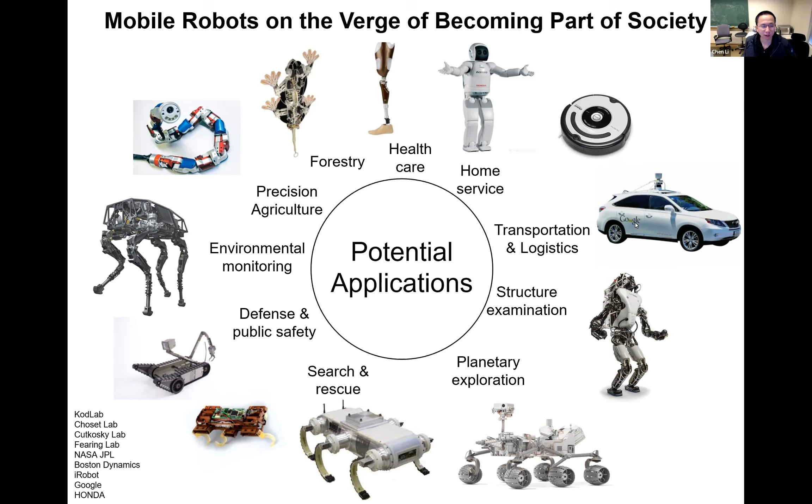When we look at how robots deal with the problem of locomotion in complex environments, it has very often been considered as a problem of obstacle avoidance. As an example, the self-driving car uses sensors to scan its surrounding and create a geometric representation or map of its surrounding. You can then plan a safe trajectory to avoid anything other than the paved road, and then very often transition between different driving modes to reach your goal.

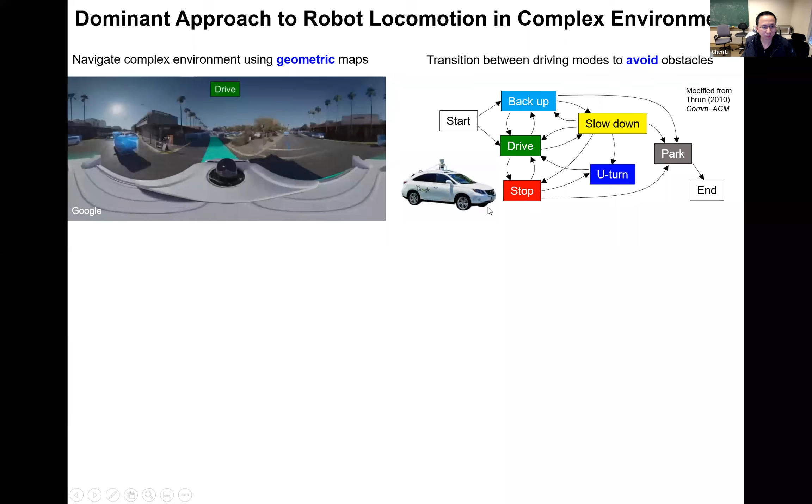In order for this to work well, there are two premises. First, the interaction between your vehicle or robot and your environment, in this case the wheel-ground interaction, needs to be well understood. Second, your vehicle or robot needs to be readily controlled to follow the planned trajectory well.

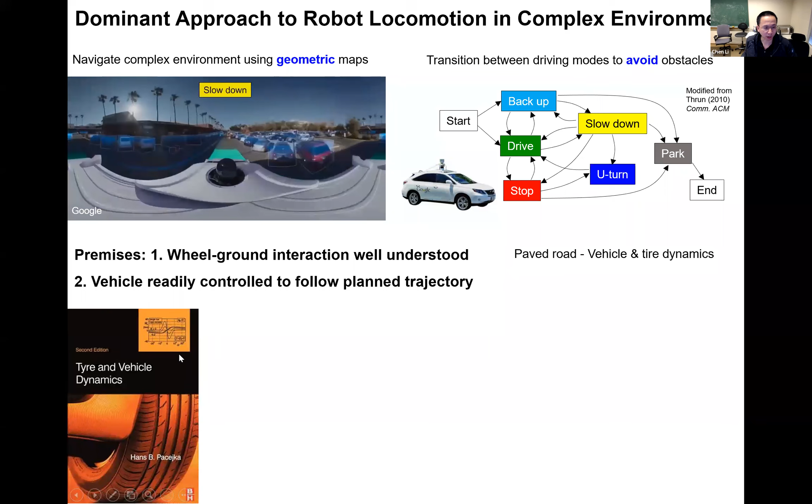This is thanks to, especially the first one, but also the second one, really thanks to development in the fields of tire and vehicle dynamics for paved roads, as well as terramechanics over the last few decades for off-road vehicle-ground interaction.

Analogous to this, we also have very good understanding of the aerodynamics and hydrodynamics of both biological and artificial devices moving in fluids, flying and underwater locomotion.

On the other hand, for terrestrial locomotion that's non-wheeled, that is biological or bio-inspired robot locomotion, our understanding for a long time had been relatively limited to relatively simple, flat, rigid ground, and very often looking at how to maintain near steady state single mode locomotion, such as walking and running. While we have really fantastic progress of these kinds of models,

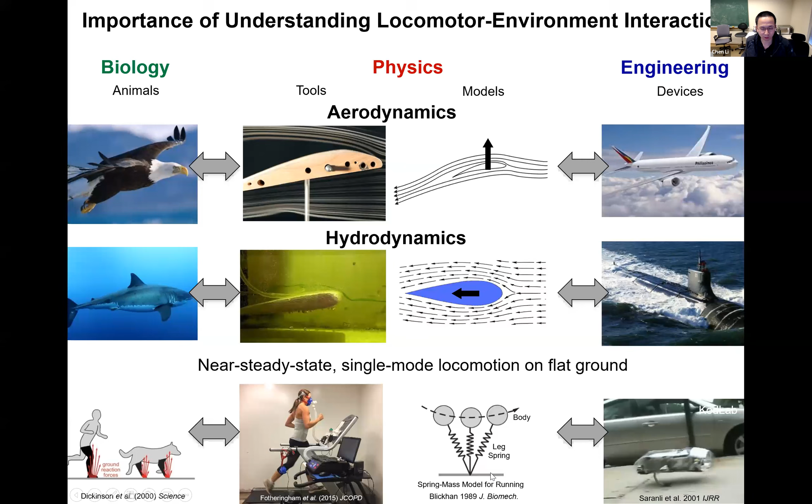we already have, through decades of development, fantastic models describing such leg-ground interaction. And this really is the basis of a lot of modern legged robots.

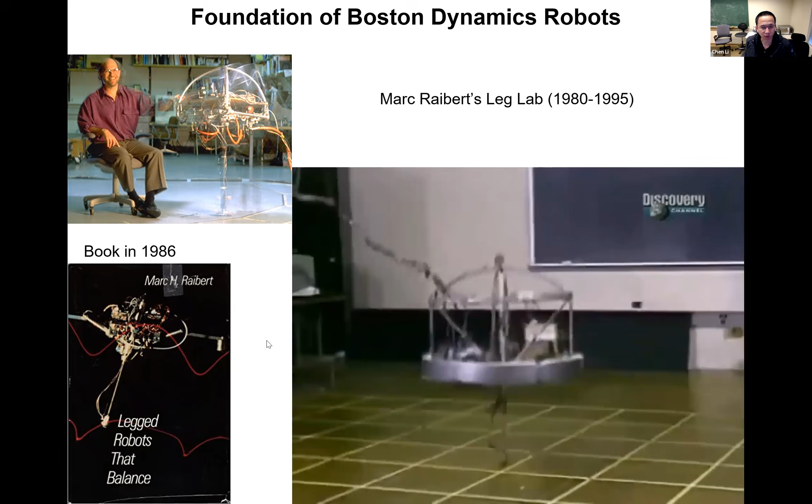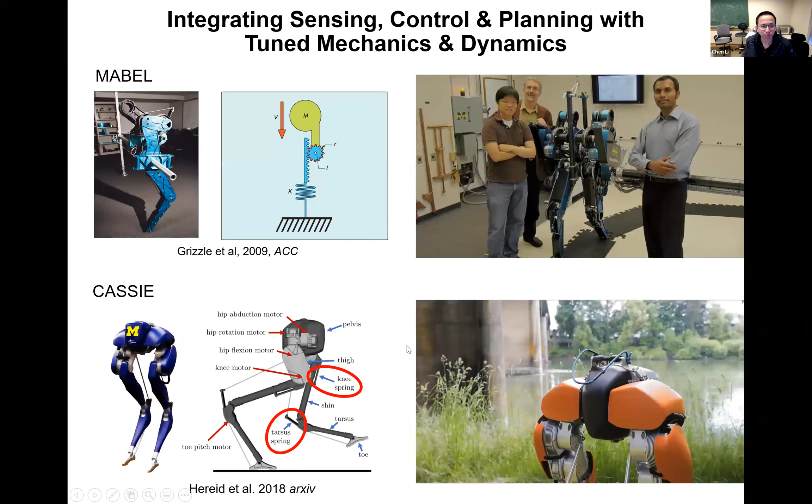Just a little bit of history. Marc Raibert, before starting Boston Dynamics, was actually a professor, first at CMU and then MIT, and he studied legged robots interacting with the ground, making use of fundamental mechanics understanding to build these beautiful early robots, which provided the foundation of more recent Boston Dynamics robots. You can see here they have elements in the leg built in to make use of the spring-like bouncing dynamics on rigid ground. This is also true for other more recent robots, as shown by some examples here.

However, when it comes to more complex terrestrial environments, such as desert sand or Martian soil, where you have ground that can deform and flow under your feet, or forest floor, where you have a lot of obstacles piled together, and earthquake rubble, a similar terrain, we can see that obviously these relatively simple ground interaction models will not apply.

So in order to make progress, we need to begin to develop more tools and models to systematically study and understand the physical interaction with complex terrain. Or in other words, we need to create this new field of terradynamics.

This was really first started by my PhD advisor, Dan Goldman, in his lab. Through an experimental physics approach, his lab focused on understanding different forms of locomotion in granular environments. I was fortunate to be one of his first PhD students, and I worked on legged locomotion.

I studied how lizards and legged robots run on sand, and eventually create physics models. Here I have to be very grateful for Paul Umbanhowar, who at the time was collaborating closely with us. I vividly remember Paul coming to Georgia Tech and carefully watching how the leg of this robot interacted with sand.

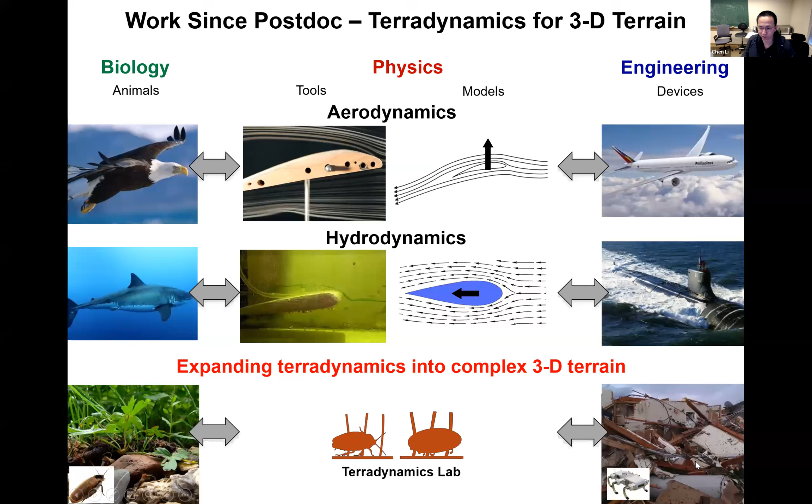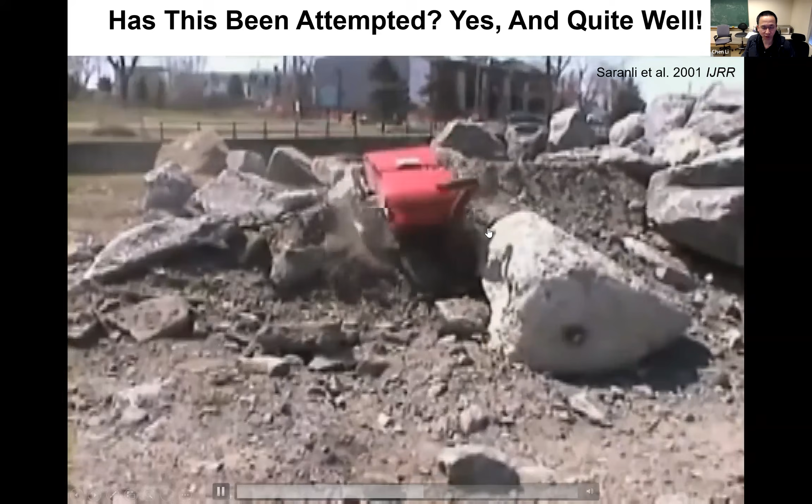That said, people have attempted to do this and had reasonable success, except it's mostly through trial and error. Here's a very early video from Koditschek's lab, around early 2000s, and you can see this RHex robot can actually do pretty well overcoming fairly large obstacles through its nice mechanical design as well as human manual control.

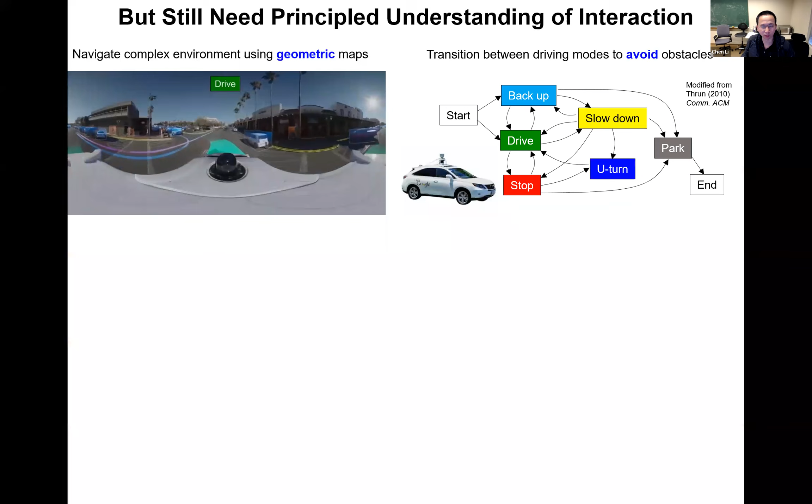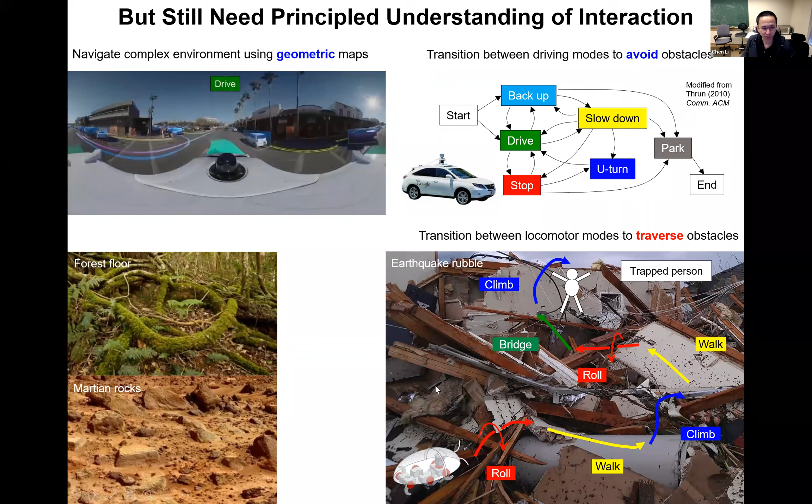But we still lack a way to do this in a principled way. My hope is that if we can have some kind of principled understanding with predictive models, we can eventually begin to make predictions of how you can transition between various modes to reach where you want in this kind of environment. And this is the video I mentioned of the RHex failing in such terrain.

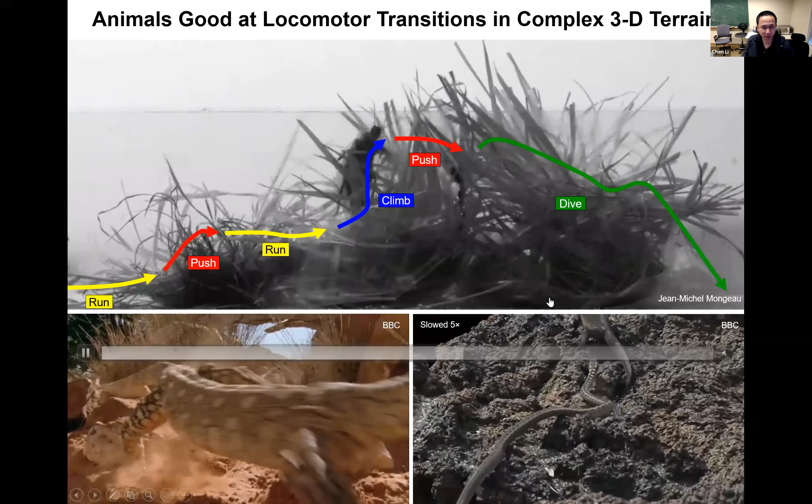Animals, obviously, can do this really well, as we all know. In this example, you can see a cockroach making transitions between several different modes to go through this very cluttered grass obstacle.

When we look at our understanding, our more quantitative and predictive models of legged locomotion, we can see that the majority of these models, as I mentioned earlier, really focus on how to generate and stabilize a limit cycle, single-mode locomotion, such as walking and running.

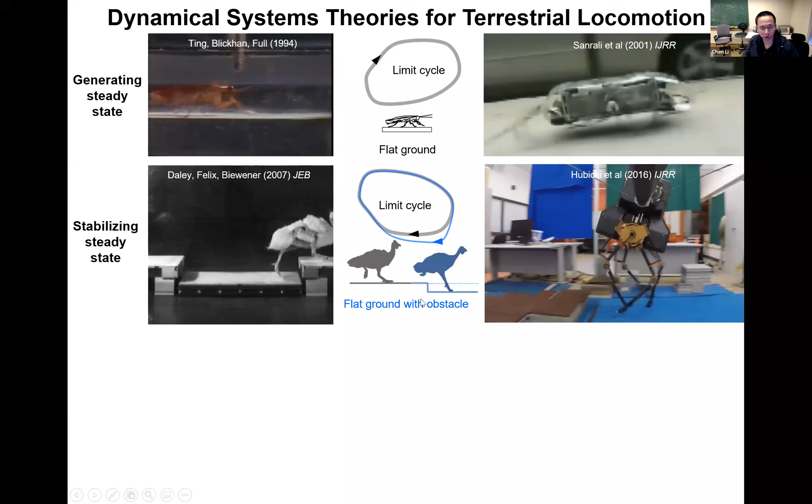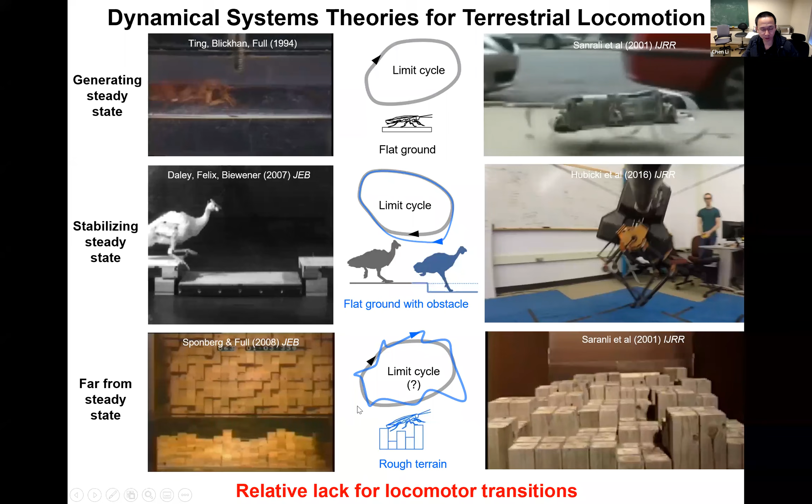However, when you start to interact with these large cluttered obstacles in real world terrain, you can see this is unlikely to be the case—the system often gets thrown away from that. So we have a relative lack of theories or even concepts to think about locomotor transitions.

When I first thought about this problem, a forest floor like this just seems formidable. You have all kinds of stuff piled together—they're heterogeneous, both in physical properties and spatial distribution. So how do we even begin to study them?

The very simple first step I took as a postdoc was to zoom in on one particular type of obstacle: dense vegetation. I picked grass as a relatively simple model terrain. But even real grass can be quite heterogeneous and complex.

So what I ended up doing is to use laser cut paper to assemble into these artificial grass, much like you can use a wind tunnel to enable repeatable experiments.

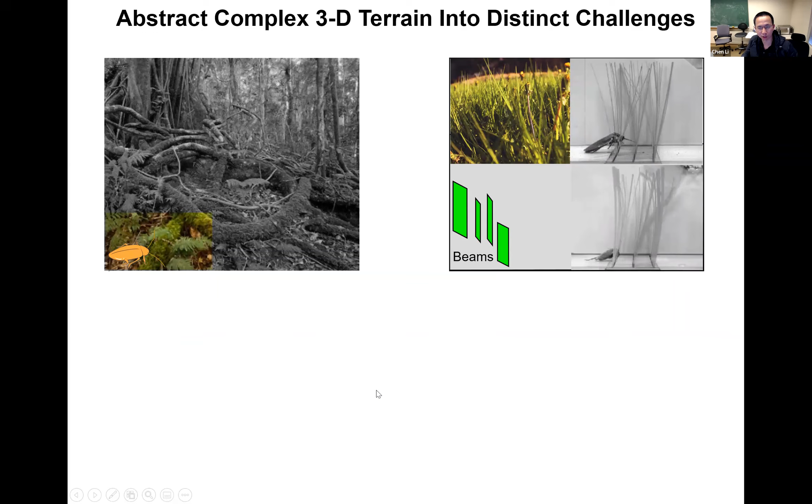In this study in Bob Full's lab, what I found is that if you look at one attempt of the animal traversing, it seems quite stochastic. The animal can sometimes push and roll its body to go through the narrow gaps, and other times it might try to force its way, pushing forward and climbing and falling forward. If you look at one trial, you can't really predict what it's going to do.

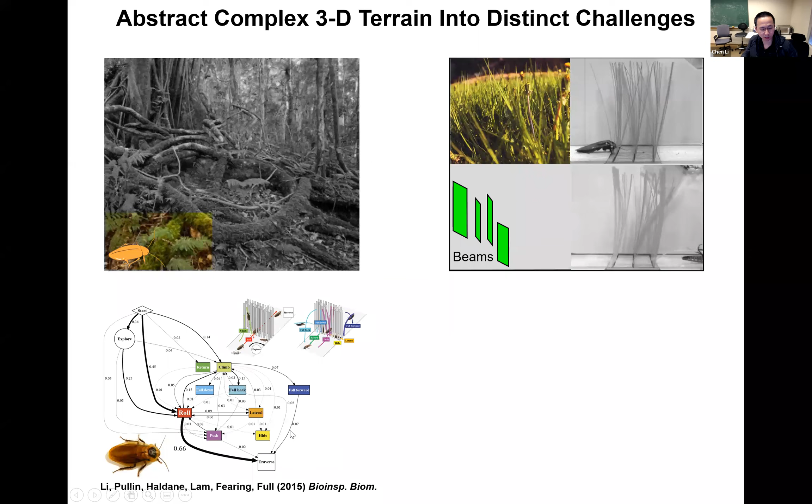But when you have a lot of trials, this is actually from almost 300 trials, you can see that patterns start to emerge. Despite it being very stochastic, the animals seem to use this particular mode, rolling, most frequently, about two-thirds of the time to traverse. This turned out to also be the fastest mode, significantly faster than if the animal uses any other modes.

So that's part of the discovery from my earlier work. In my lab, when we first started, I was thinking how we can really begin from here and go towards something more like a real world terrain.

Obviously, this is not like air and water, in which you have a uniform media. You have these really large heterogeneities. So the very naive approach that we have taken is to abstract these into different kinds of obstacles, which I'll elaborate in just a little bit.

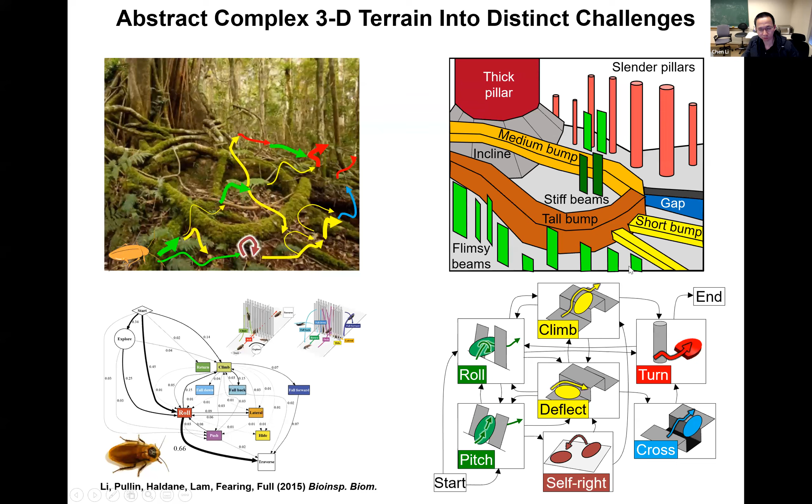Our hope is that if we can understand how the locomotor modes and transitions emerge from locomotor interaction, which can be controlled, then we can perhaps piece these together to begin to understand and even control robots to go where they want in a probabilistic manner.

We take this integrative, interdisciplinary approach. We study animals as model organisms, which can help reveal capabilities and limits. They can also provide inspiration for robots.

We also build robots, very often very minimalistic robots, which we consider more as physical models through which we can do repeatable experiments and vary parameters to test hypotheses.

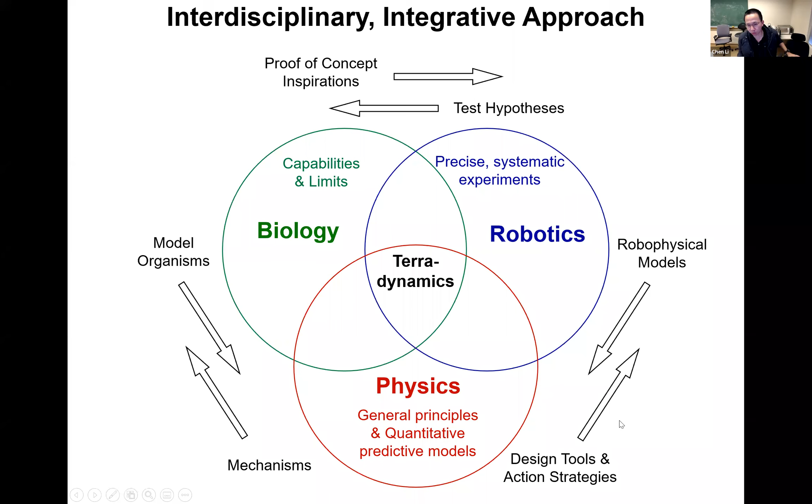Then, based on observation of both animals and robots, we can try to come up with physics models to reveal general principles, and in some cases even have quantitatively predictive models which can help reveal the mechanisms of animal locomotion, both success and failure, as well as provide design tools and action strategies.

We also develop imaging methods to combine multiple cameras with automatic tag tracking to enable 3D quantification of the interaction, which turned out to be somewhat challenging because of occlusion.

And also, this is a very recent development. We also developed this device. Actually, it was built quite a while ago, but we only recently analyzed this data and it's in review.

So we have bumps that are quite high, but you can still move over. We have gaps that you need to bridge across. We have rigid obstacles that we call pillars that you need to go around. We have flexible and movable obstacles like beams, and then we also have, in this case, self-righting, because the animals and robots very often get flipped over in such rough terrain.

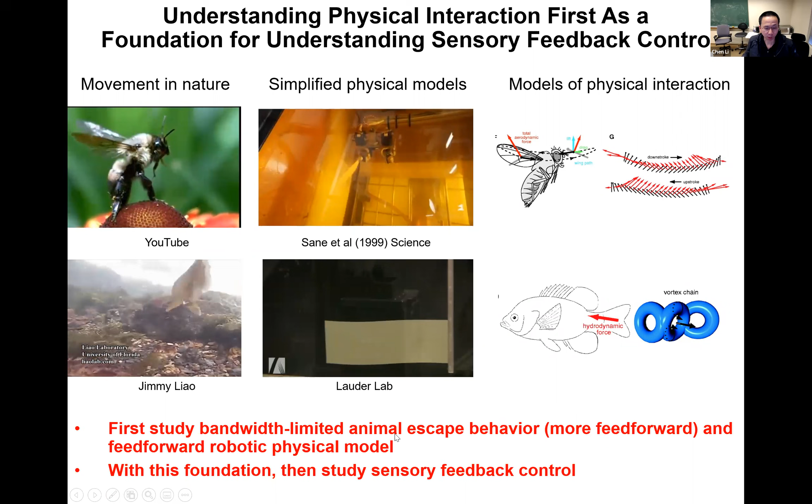But it has turned out to be quite fruitful to first study completely feed-forward robotic systems, as well as animals in the more feed-forward regime, where their interaction mechanics plays an important role in the emergence of their movement. In our case, we focus on studying the bandwidth-limited escape behavior or emergency self-righting behavior, in which the feed-forward effect plays a dominant role. We also start with a feed-forward robot. Once we have sufficient understanding, we can then build on that to further study the sensory feedback control.

Here is the project I want to highlight on legged locomotion transitions. This is led by my PhD student, Ratan, who just defended and just got an offer yesterday. I was pretty happy with that.

In this study, he focused on this transition of cockroaches going through grass-like beams, much simplified, transitioning from what we call a pitch mode to a roll mode.

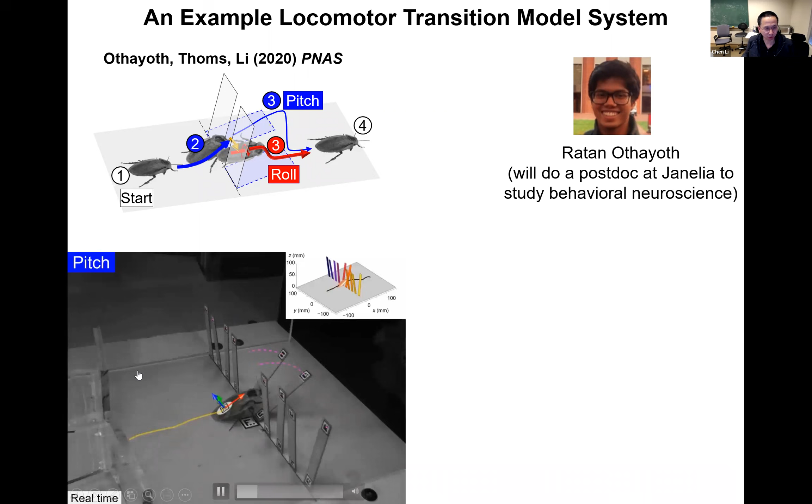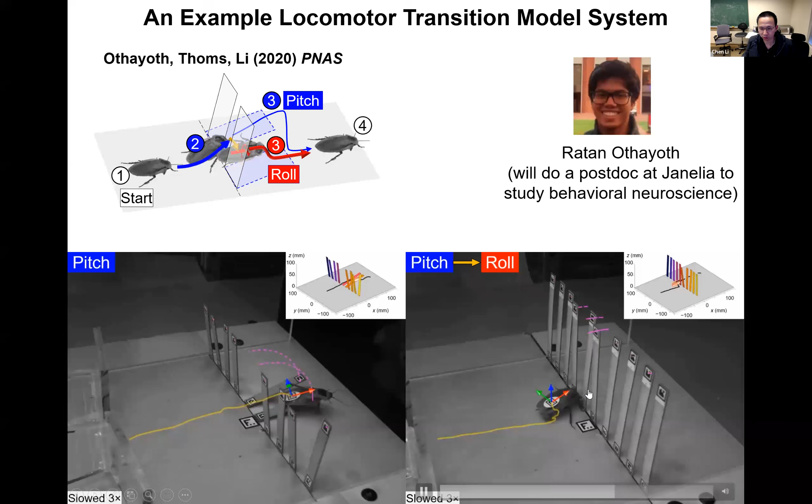Here's what a pitch mode looks like. It really is the animal pushing down the beams, in which its body has to pitch up because of the restoring torque. And here's the animal initially trying to push, but before it even proceeds forward much, it makes a quick transition into this rolling mode.

So how do we begin to understand how this transition emerged from the physical interaction and how it can be controlled? The simplest model we came up with is to merely consider the potential energy of the system. This is an extremely simplified model. There are a lot of assumptions and approximations, and we're completely ignoring the dynamics, but it turns out to give us a lot of useful insight.

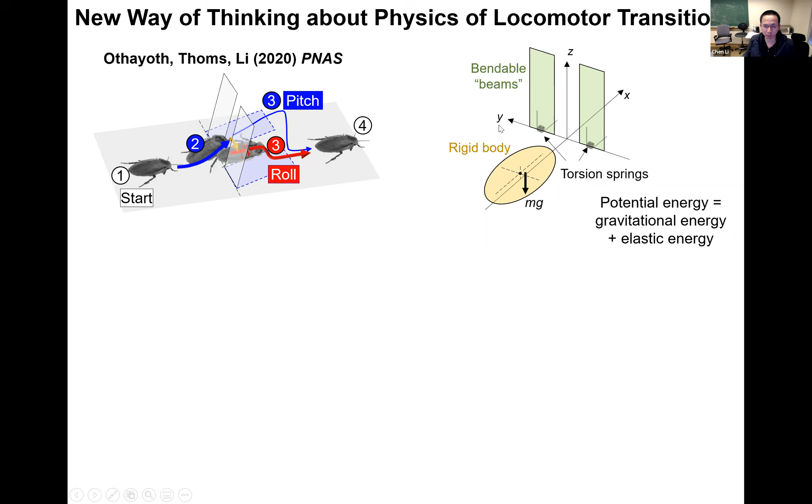Here we consider the animal as just a simple ellipsoid, which their body shape resembles, and then these two plates as rigid plates with torsion springs. We can then calculate the total potential energy of the system if we have measurements from the real system.

So what this just suggests is that perhaps this transition from a pitch mode to a roll mode is a transition of the system from being attracted to this pitch basin to this roll basin, in which you have to overcome a potential energy barrier. So this is our first hypothesis, that this transition might be viewed as a destabilizing barrier-crossing transition, destabilizing yourself from this attraction. And in addition, how can you do this?

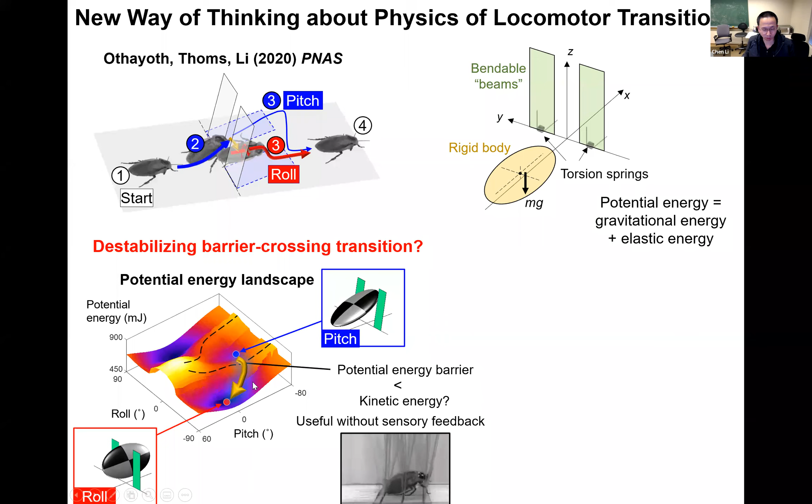If this is comparable to this potential energy barrier, then you would be able to make this transition by crossing the barrier, and this would be possible even without any sensory feedback.

So to test this, my student Ratan built a robotic physical model, which is a physical realization of our simple model. The body is suspended through a gimbal mechanism that allows it to freely pitch and roll with little friction and damping. And also the beams have torsion springs.

So he can then drive it forward as well as oscillate it up and down. We also tried rotational oscillation, and qualitatively the results are similar.

So here are representative trials of the body going forward without oscillation. You can see if it's in the middle of the beams, it's going to be stuck in that pitch mode. And if it has sufficient oscillation, it very quickly transitions to this rolling mode.

After Ratan did this many times, visualizing here, this is the potential energy landscape we constructed from the measurement. He actually tracked the 3D motion as illustrated here to reconstruct the landscape and then show where the system is, which are these dots with a trajectory. So each of these trajectories is one trial.

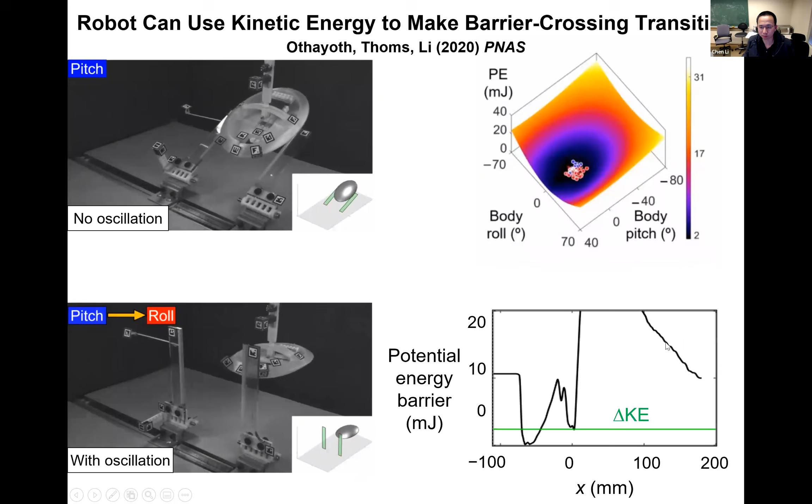So what we can see is that indeed, when the system is stuck in the pitch mode, it is attracted in that pitch basin. These ones that happen to go out is actually an artifact, which I can explain in more detail. But then when the system makes the transition, they all escape from that pitch basin and reach the roll basin. And then we can also quantitatively test the second hypothesis.

So what Ratan did is to measure from the minima of the pitch basin into the roll basin to find that saddle point, to measure the potential energy barrier, the minimum barrier you have to cross to make this transition, which is shown in this black curve.

So it actually changes as you move forward, indicated by X position. And you can see that it goes down to very low, and this green line is the measured system kinetic energy fluctuation.

And we found that it is exactly when the kinetic energy fluctuation is greater than the barrier that the system makes this transition. So this confirmed our second hypothesis.

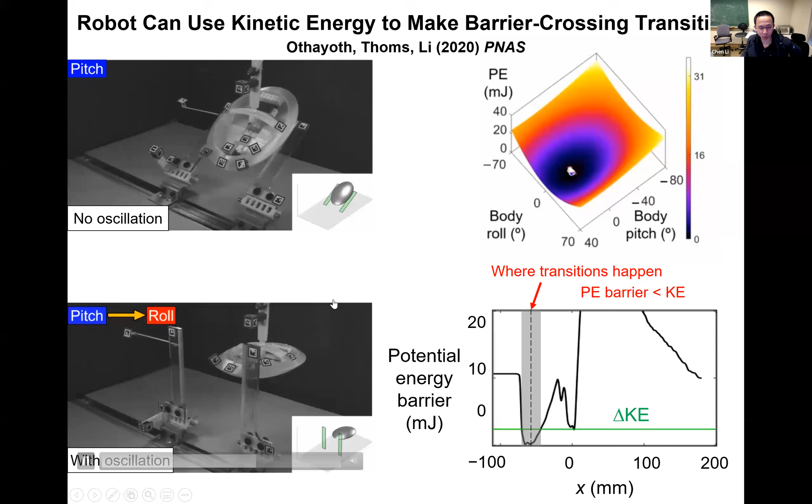And this is not surprising because this is a purely physics-driven system. There's no central feedback control. In addition, we were curious to see what the environment might have an effect on these transitions.

But when the beams are really stiff, then it is much less favorable to push across because you have to overall, through this traversal, overcome a huge potential energy barrier or inject a huge energy. So simply driven by physics, the systems can either stay in the more favorable mode, pitch mode here, or find the roll more favorable mode, roll mode here.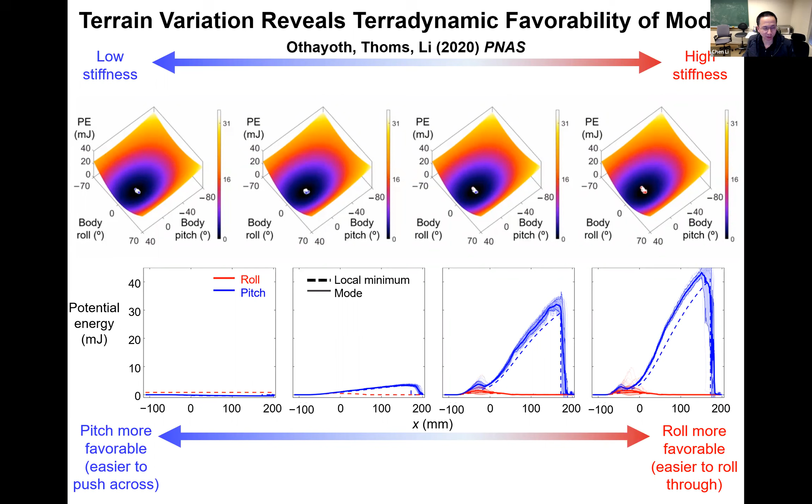So actually what we did is just to simplify the analysis and representation, we flipped all the videos or the kinematic data so that it always rolled to one side. In the case of animals, it's pretty random, but in the robot, if I remember, I think it's all to one side because there's a slight asymmetry in the system that just breaks that symmetry.

Okay, thank you. Okay. Yeah, and then so that's all about the robot. So Ratan also did all these for animals. So we found everything to be consistent except one thing, which is where this transition happens.

So you can see that this is the span where it happened. It actually happened well before the potential energy barrier had dropped to below the kinetic energy fluctuation.

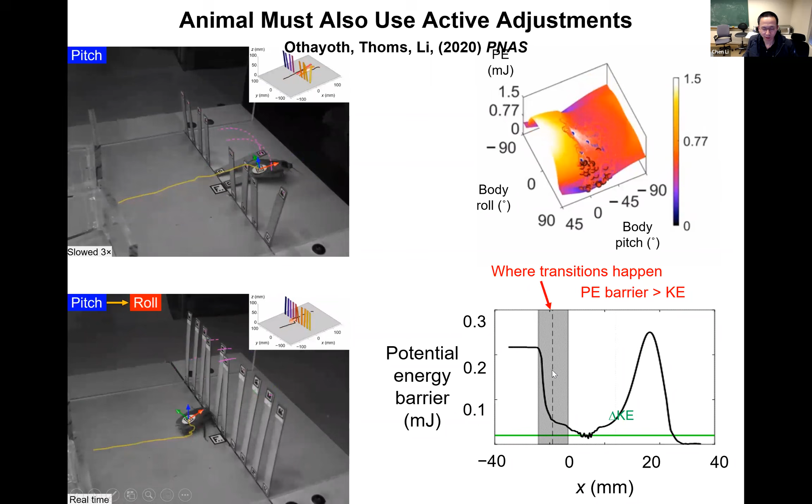Again, this is not surprising because the animals are not dumb robots that just oscillate like particles. They can use a lot of sensory feedback and perhaps even planning and learning to do this. We haven't studied those mechanisms carefully, but we believe these are likely contributing to their ability to do this. So we are just recently beginning to look into it.

This is a recent study led by a more junior PhD student, Yaqing. He performed experiments to quantify the kinematics of the body and the hind legs in more detail, and he found four things that might be helping them.

The first is that they tuck their hind legs in right before they roll. We think that is reducing the roll stability, but without force measurements, we can't say that for sure.

The second is that one hind leg seems to be pushing, whereas the other is retracting. Again, we think this might be generating a roll torque, but we still have to make force measurements to confirm this.

We also found very peculiar head movement. Their head actually bends up and down relative to the body. It's not strictly periodic, but there seems to be some rhythm, and that's before they make the roll transition.

After they roll into the gap, they continue to flex the head as well as the abdomen. We think this is maybe helping them break the frictional or interlocking contact of their body asperities with the edges of the beam.

For the head flexion, we first thought that it might be somehow reducing that barrier, and we modeled that, but that doesn't seem to be the case. So right now we're testing the hypothesis that this could be a form of active sensing, adjusting yourself to tune your sensing of the resistance from the environment, the physical interaction.

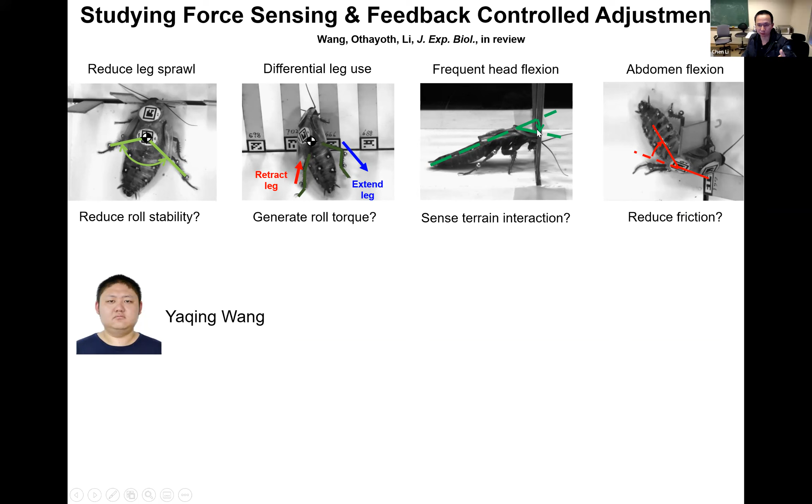To better understand the principles here, Yaqing has just developed a new robot which looks similar to the earlier one, except that it has force sensors embedded. It has the head, body, and abdomen segments and joints that can be controlled.

The control here is under-actuated, because in the animal, roll and pitch are not just controlled by the animal, they're also partly determined by the interaction. So we have the motors connected to the bodies through a spring.

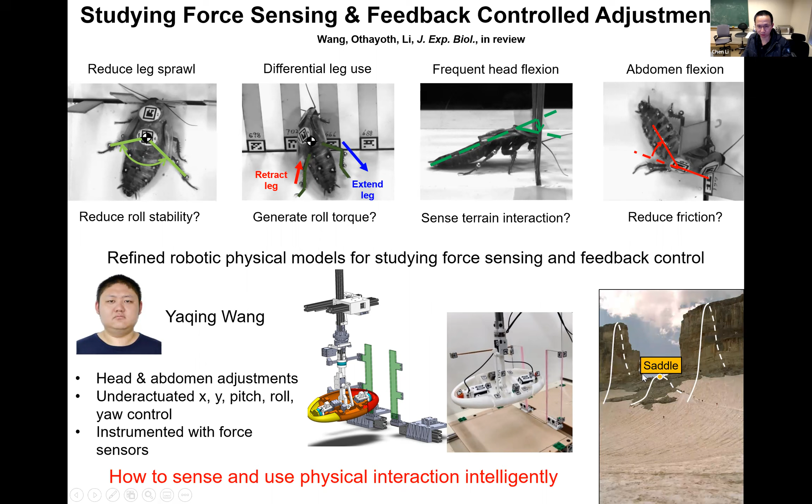We want to use this to systematically study how to sense and use physical interaction and act on it intelligently. One intriguing hypothesis we had is this: if you consider a human going from one basin to another, crossing a mountain ridge, we can see where that saddle point is and just choose that path, which is what these people do. But such a potential energy landscape, we can't really see. Can we somehow infer it and choose an easy path?

We show that the behavior of these systems is strongly dominated by the potential energy landscape, which is basically a description of the conservative forces, though there are also non-conservative forces at play. However, if the conservative forces play a dominant role, then perhaps if we measure these contact forces, we can somehow get an idea of the conservative forces, even if not accurately, at least in the ballpark. If we can then use that to infer such a landscape, we can make the transition as we decide.

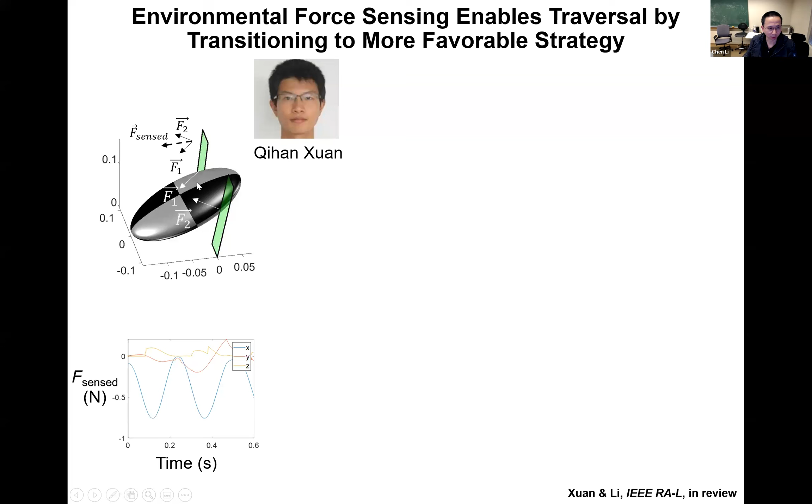So another quick demonstration along these lines, much simpler: just a simple rigid body. What my student Qihan recently did is develop a dynamic simulation in which this body can sense its contact forces from the environment, as shown here, and use that together with the energy landscape to determine which mode is more favorable and act upon it.

Here is a feed-forward case without any control. When the beams are very stiff, and we don't push it forward with an actuator that's strong enough, it's going to get stuck here.

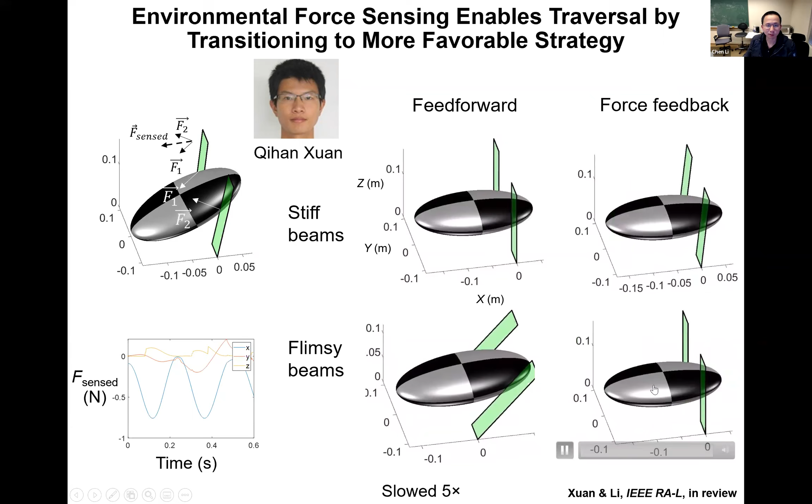But now if you have some force feedback, so we detect, oh, these beams are too stiff and rolling would be more favorable, we can then actuate this to roll and then let it roll back, and then we can demonstrate this.

Okay, so I have spent some time talking about this beam traversal example, but as I mentioned, we have studied these other distinct challenges, and initially we didn't really expect anything common to come out of this, but we actually found quite surprising commonalities.

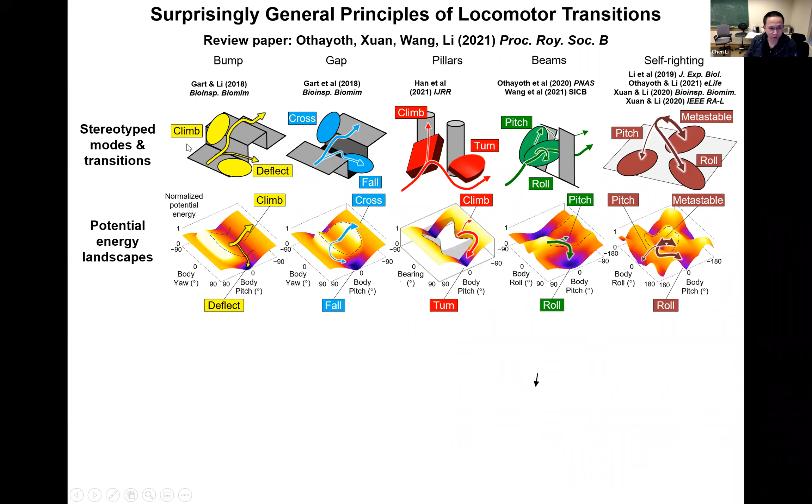First, we found that these interactions all result in stochastic yet very stereotyped locomotor modes and transitions. Earlier we didn't model all of them with a potential energy landscape, but recently we added this view to all of them, and found this can be explained by the fact that on your landscape you have a small number of deep basins that the systems are attracted to, which shows up as these modes, and the transitions are barrier crossing transitions.

Finally, earlier we didn't take this landscape view, but in particular robot experiments, and also some animal experiments, we have empirically discovered strategies to help make desired transitions to traverse obstacles or to self-right, which are summarized here, which give you a boost in your traverse or self-righting performance.

But when we use this landscape view more recently, we found that this can be categorized into three things. You can either steer yourself on the landscape, or you can modify your shape or how you deform yourself. If you do that not to a great amount, then you will quantitatively change the landscape to increase or decrease the barrier, which helps suppress or facilitate some transition. But also you can do that a lot, to even remove some basins or add basins, basically changing the topology to eliminate or add new modes.

So there are these surprising generalities. This is just a video showing a metaphor we think applies: in this case that we have studied with large obstacles or strenuous self-righting.

The potential energy barrier is so high that you really have to understand it and do control or actuate or plan your motion well, to be able to not waste your effort as this little dog is doing.

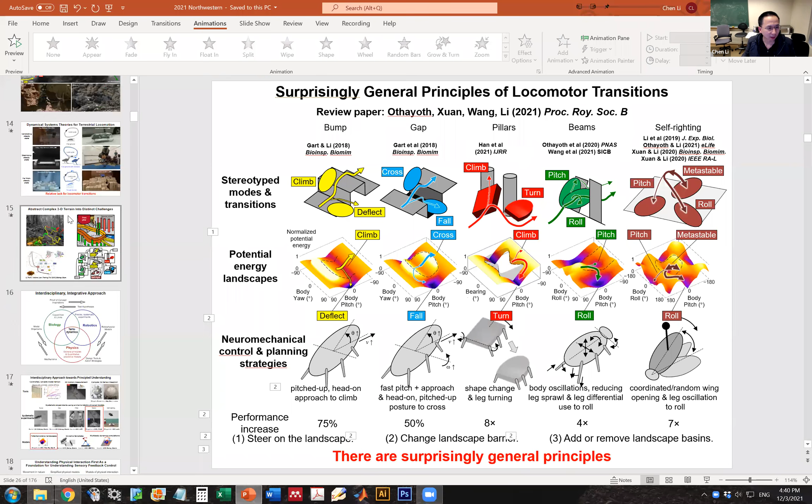So for the self-righting, I can show a quick video. Go back. Yeah, here, this video.

So you can see this cockroach, one of the primary self-righting modes is for them to open their wings to try to push against the ground. But it turned out that the potential energy barrier is really high. They can rarely build up enough kinetic energy by doing this, and that usually gives them a pitch motion because the wings are symmetric.

So what turned out to be important is that they have this flailing of the legs, which we looked into a little bit to see if there's any rhythm or learning, or maybe evidence of learning. We didn't see much, so it seems to be quite random. We think that in this case, yeah, that's evidence of what you just described.

Although we had done another study using modeling, shown below, where we have this template modeling.

So we started with random oscillation, but once we have a model that's predictive, we can actually do it at the right moment, kind of pumping energy at the right moment, so that turned out to be, overall, the energy cost is much lower.

One other question: has anybody with these animals ever done anything like glue them together or add a bit of weight to see if they can actually dynamically change that model, or if it's really kind of fixed for their body? Great question.

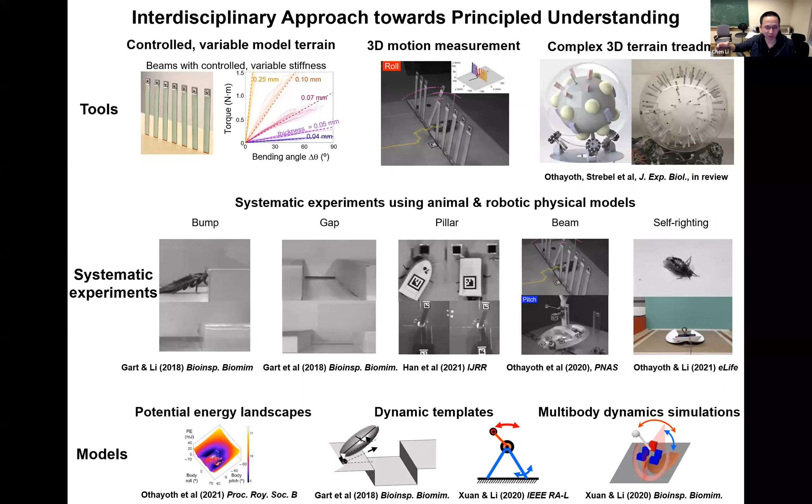So actually, for the self-righting, we also wanted to test a similar hypothesis, like how important this kinetic energy is. We had a robot with which we can easily do that, but for the animal, we glued heavy beads to their feet, which would definitely change how they move. I think their leg oscillation frequency is a little lower, but it does give them quite a bit more kinetic energy, which makes them much easier to right. But we don't see evidence of learning—it seems quite random. Thank you.

Oops, sorry, it's my antivirus. Thought I could turn it off.

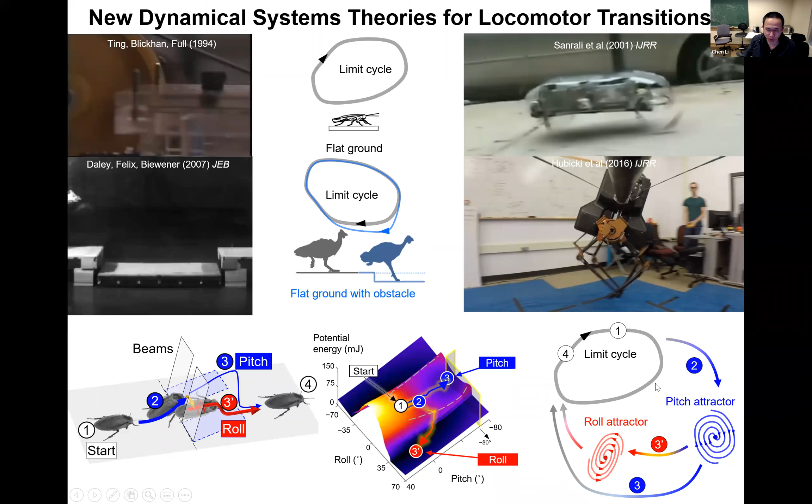Okay, so we think that this might also inform robots. Basically, in such a regime, you really want to understand and control yourself well. More broadly, back to the point I made earlier, people have mostly had limit cycle behaviors for locomotion, and we don't have any dynamical systems model for this yet, but we're hoping that what our study suggests is that there might be attractors which can represent these transient locomotor modes that can be added onto limit cycles. The difference is if you really want to go between these, not try to stay within one attractor or round.

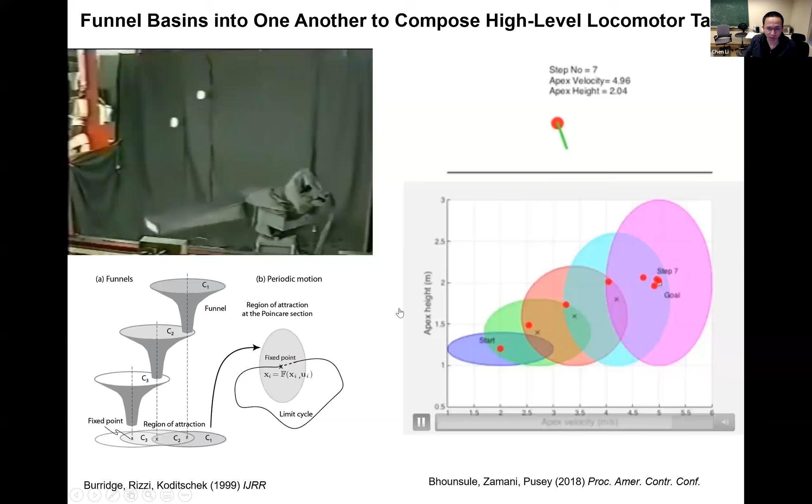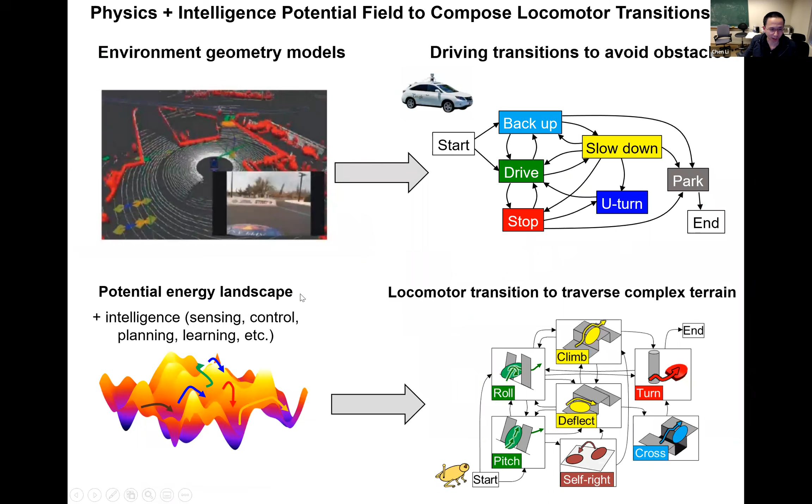This is Dan Koditschek's group doing composition of behavior using attractors funneled into each other to compose high-level behavior. We think that if we add these new dynamical systems models that might be there, we can eventually start to compose locomotor transitions, except that we really have to go away from an attractor. Towards that, we really need a more predictive physics model. Our energy landscape so far cannot predict dynamics, but we also need to add the intelligence aspects, which is important here.

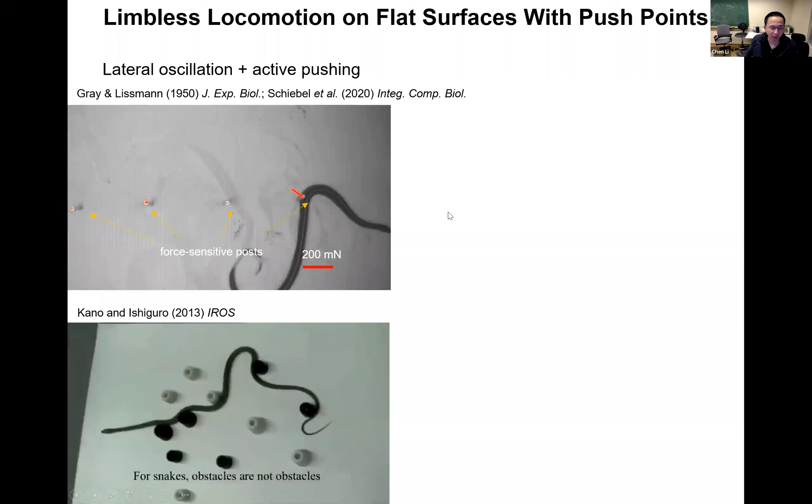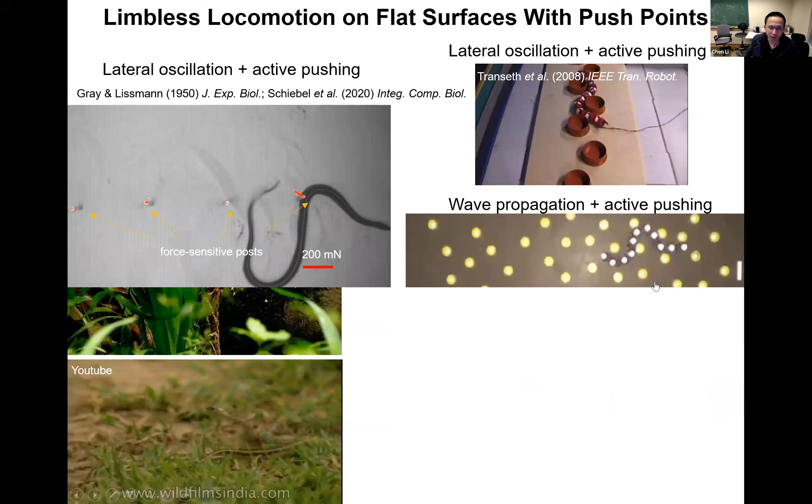In the last 10 minutes or so, I'll quickly go through a relatively minor direction, which is limbless locomotion. People have studied limbless locomotion for many decades, and a lot of studies have focused on how to move on relatively flat surfaces, even with complexity like sand deformation or obstacles. The body deformation of these animals is mostly in 2 dimensions, and we also have robots that begin to do this fairly well. But real snakes, obviously, have to overcome 3D terrain.

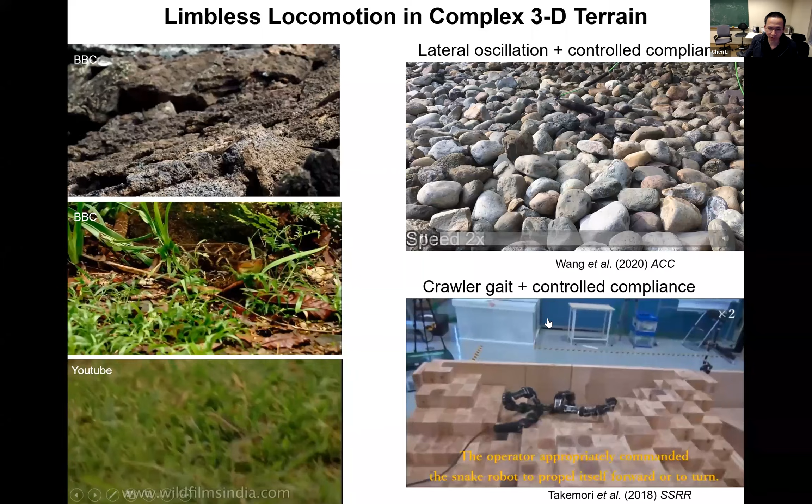Compared to these snakes, our robots are still not as good—they slip a whole lot when they try to move through. This is already a lot of progress compared to a few years ago, but still not as good as the real snake. So the problem we looked at initially is, again, a very simplified system, looking at overcoming this large step, which can be found in their natural habitat.

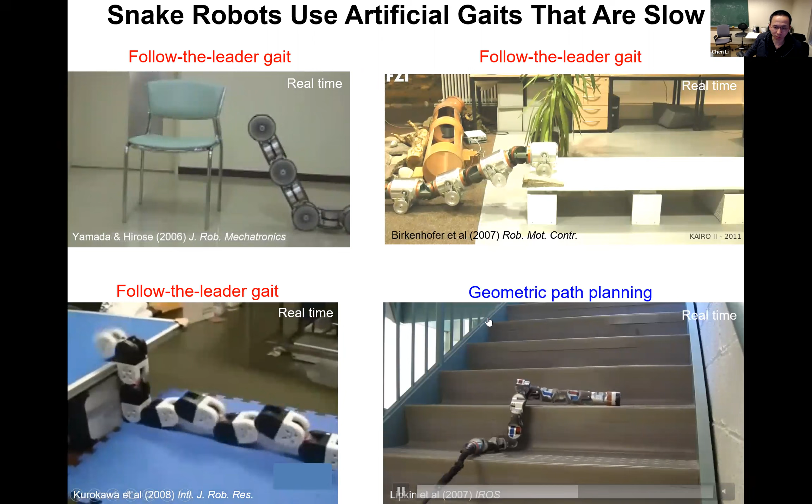When you think about these large obstacles, which are quite smooth and rigid, there's a big challenge: stability. For 2D, the body is inherently stable, but in 3 dimensions, when you bend your body out of the plane, you can lose stability pretty easily. In previous studies, snakes solve this by using environmental asperities or creating their own anchor points to maintain stability. But these large step-like obstacles are rigid and smooth, so we cannot do that. We think this is why previous snake robots solving this problem have largely used a quasi-static gait, either following the leader or geometric path planning, really trying to maintain quasi-static stability.

So we looked at how the snake traversed such large obstacles. We developed a technique to interpolate between these markers in both 3D translation and rotation, and this turned out to be 50% more accurate than previous methods, whose importance will come out later.

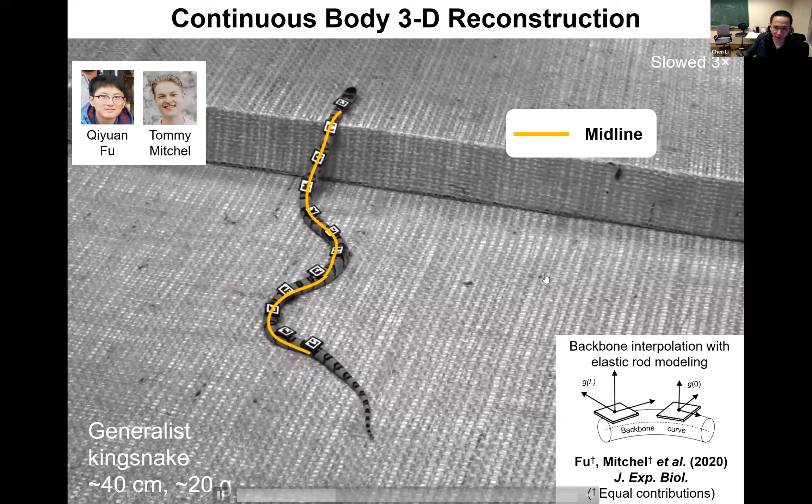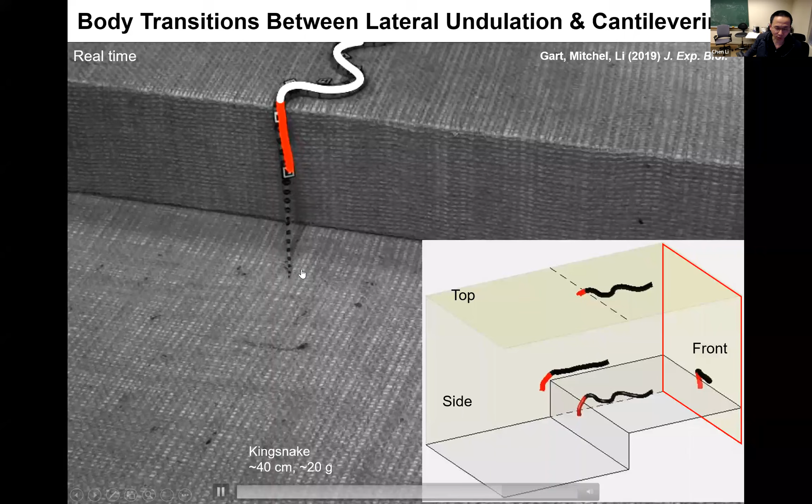So using this technique, we can then look at the gait. Here's a snake traversing a large high friction step, and you can see it still makes a transition, although it's spatial and temporal. It transitions from lateral undulation, then part of the body cantilevering to bridge the height difference, and then back to lateral undulation.

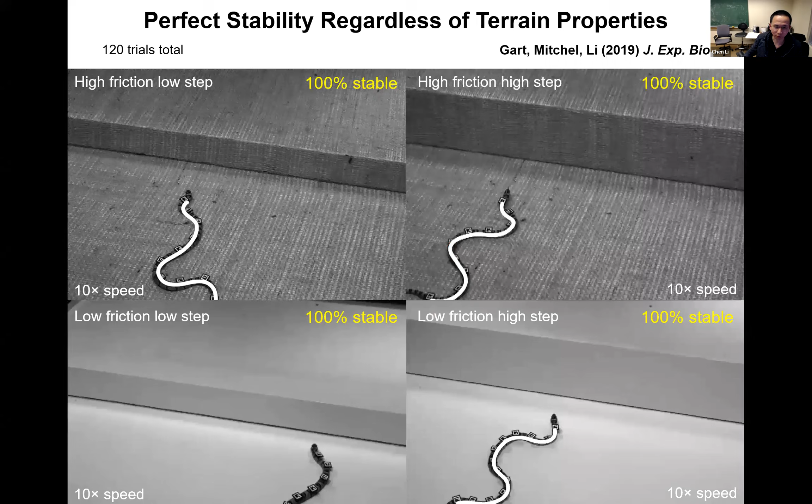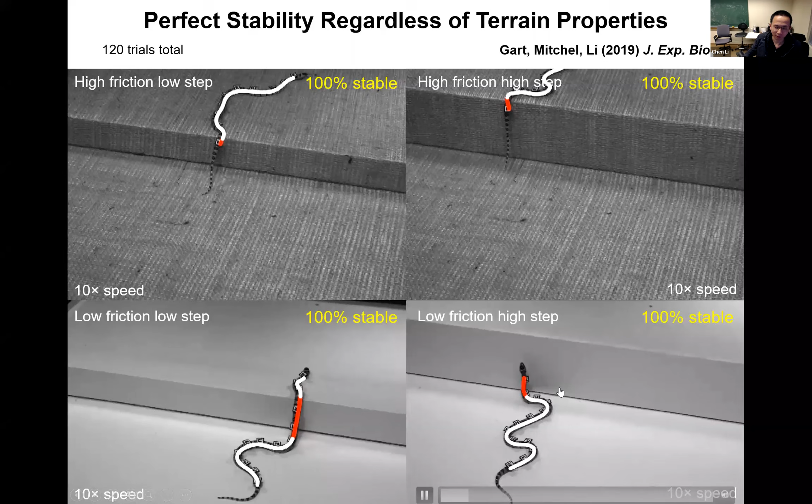This very simple transitional gait seems to be quite robust when we vary the height and friction of these surfaces. You definitely see the snake struggling more and doing more adjustment, but the overall gait didn't change. So to understand this stability principle, we developed a simple snake robot.

Applying this gait, we have a very simple feedback control which tells the robot where it is relative to the gap to initiate the transition. But other than that, it's just feed forward, feed forward.

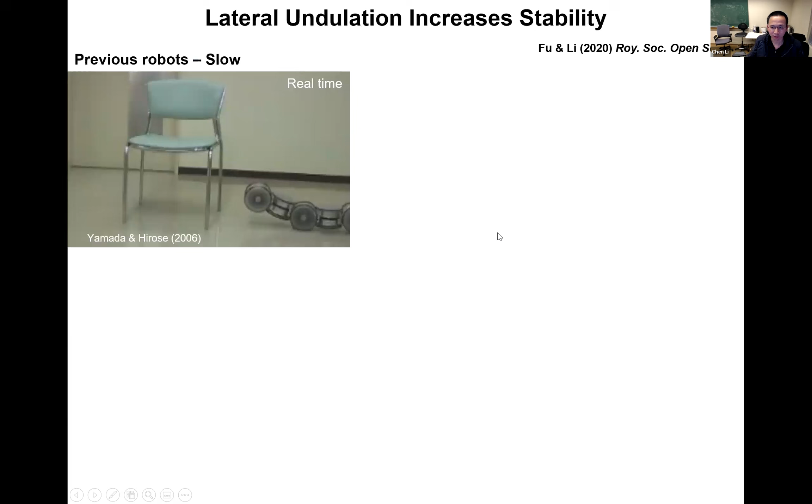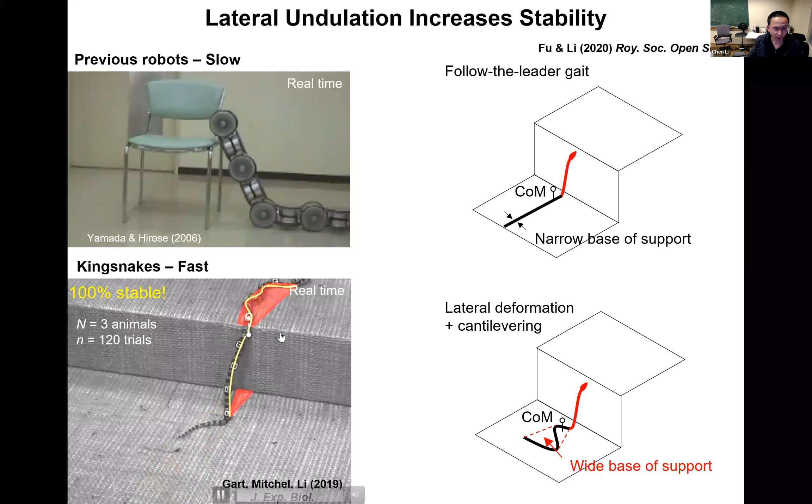Overall, we think the study suggested that having this bio-inspired gait gives you better stability so that you can afford to move faster than quasi-static and ensure perfect stability. We found in all the snake trials, it is 100% stable with the center of mass falling within the support polygon. But this is not to say our robot is really all that great.

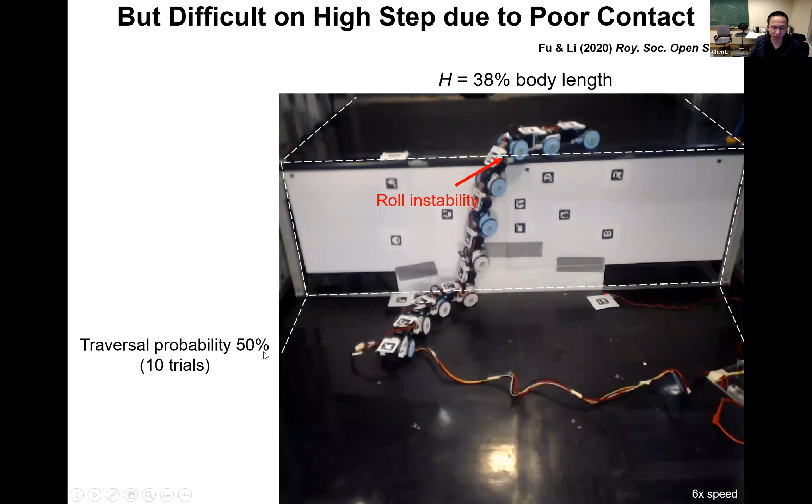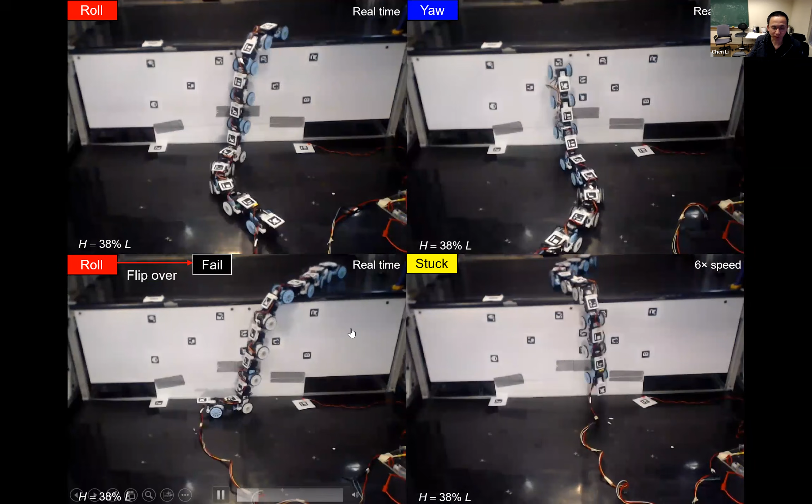So what could we do to improve this? Oh, actually, sorry, so this is actually just one failure mode. We also observe other kinds of failure mode, which I won't elaborate. But when we quantify these, we can see again this is highly stochastic.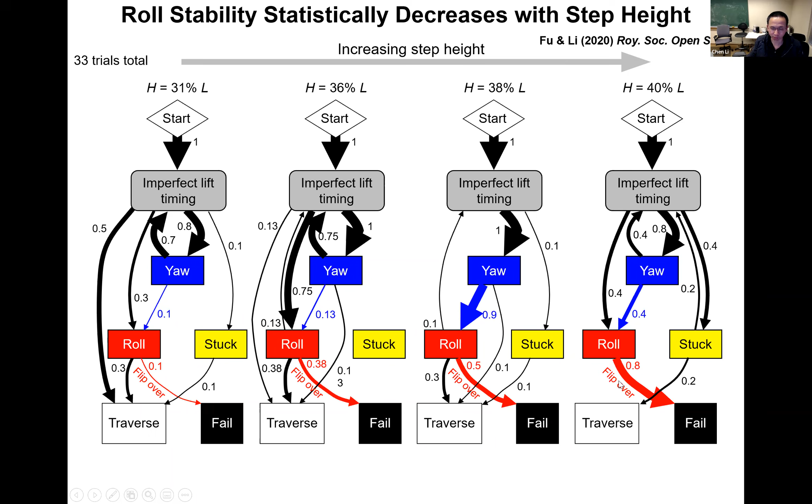It seems that whenever you have some little noise, environmental noise, or perturbation, it gets really amplified and you get thrown everywhere. So it's quite stochastic, but all of these failure modes result from this roll becoming larger and larger and eventually falling over. So what can we do to improve the robot towards the animal, which is perfectly stable?

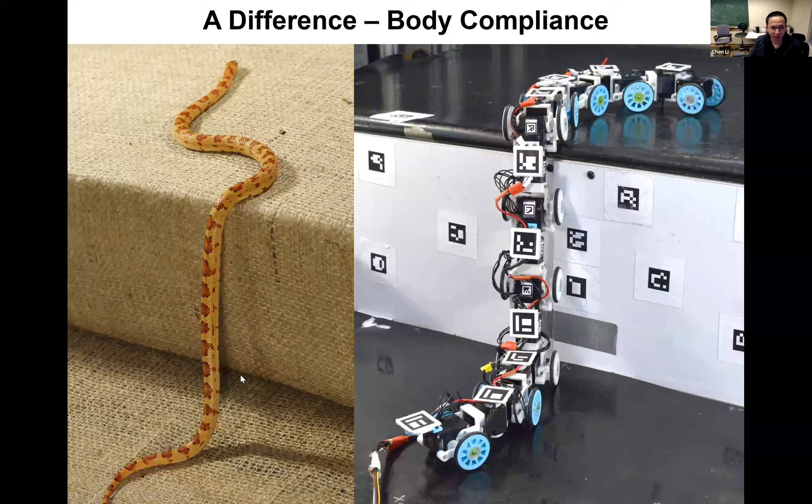There are three things. As we saw earlier, the animal can adjust themselves pretty well. They also have much more continuous body, but the simplest thing we can do is make the body more compliant in our robot, which we did, and it increases the probability of traversal to 90%, helping the robot recover from this asymmetry as shown here.

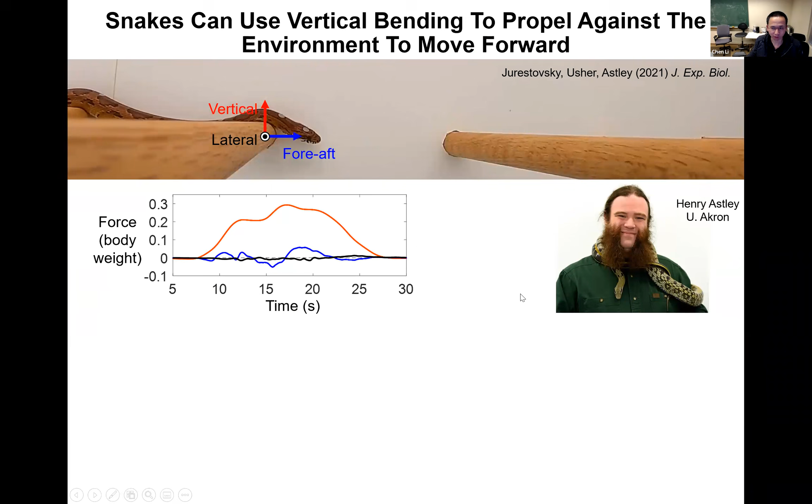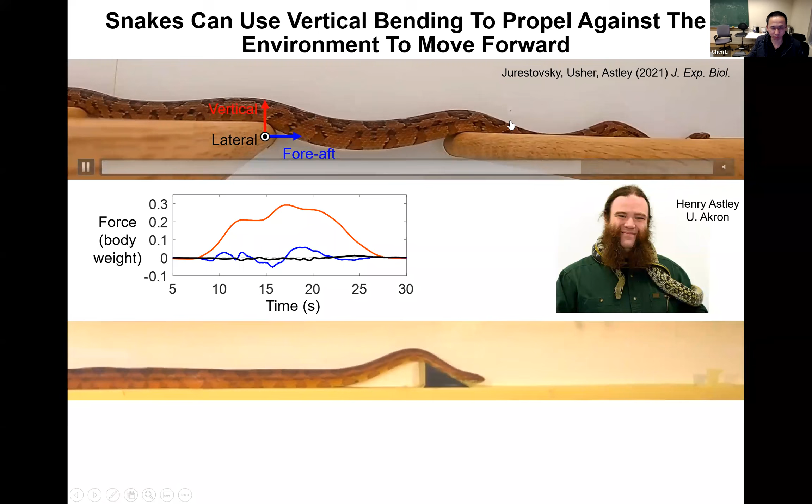And finally, just last couple of minutes, I'm really excited about the future direction of this project. You can see the snake barely slips compared to the robot. Our collaborator, Henry Astley, happened to perform experiments in his lab independently, which also found that this vertical bending of the body can be very useful in terms of generating propulsion, as you see in these two examples.

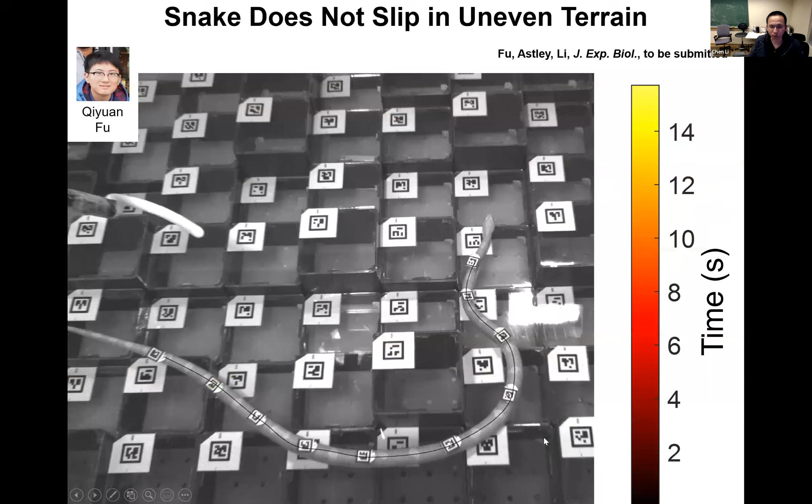Through our discussion, we believe that in the real 3D world, you really need to combine both vertical and lateral bending to generate propulsion, which likely contributes to the performance and versatility of snakes. So my student just did this quantification here. You can see very little slip except when the head turns.

And now with our quantification method, Qiyuan is able to get this, quantify where it seems to be pushing against the environment, and then classify whether it is through vertical pushing or horizontal pushing. We don't have force measurements, so we have a bunch of assumptions here, but it suggests that they occur with quite similar frequency.

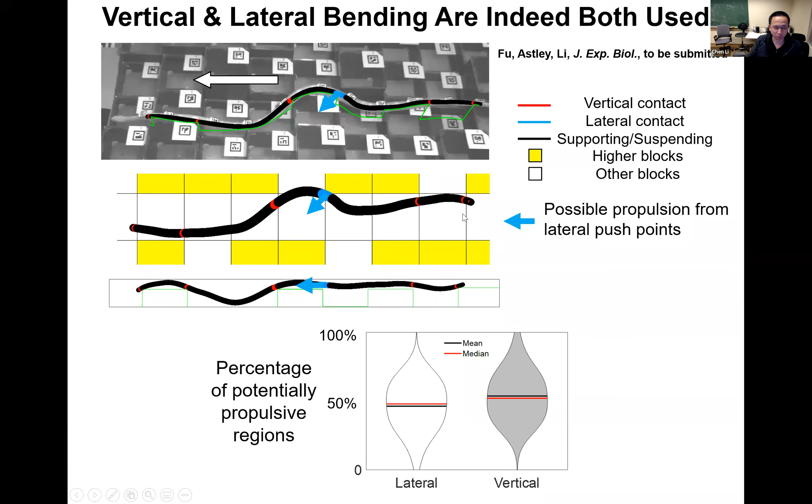Our next step is to develop a sensorized terrain module to begin to measure forces. And finally, we have a robot in which we embedded sensors to measure the contact forces, so we're hoping to also use this to study the feedback principles here.

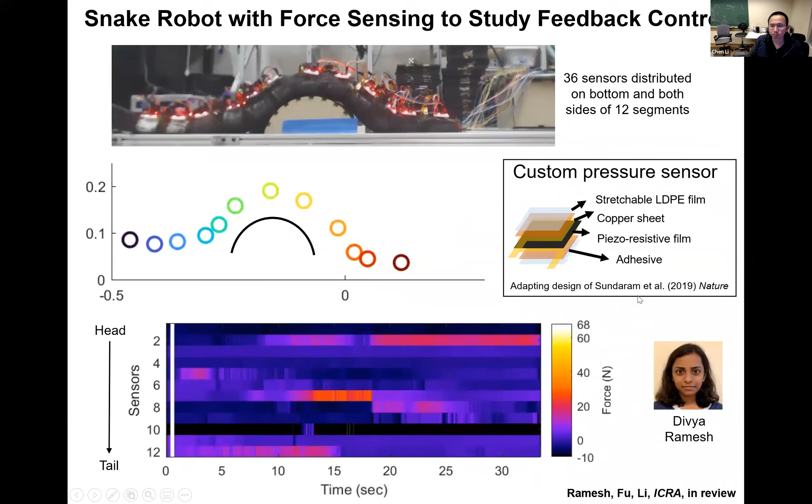Yeah, so the very, very long-term vision is perhaps we can someday have these physics models of the environment added to the geometric model to really enable our robots to do many things that we really want.

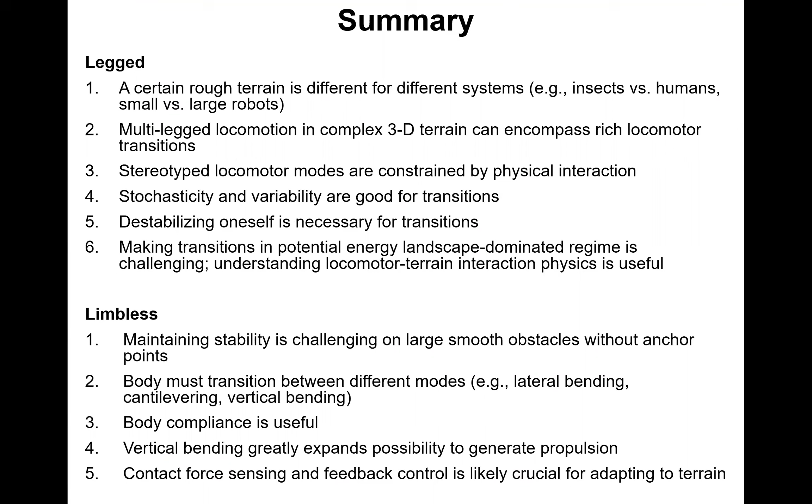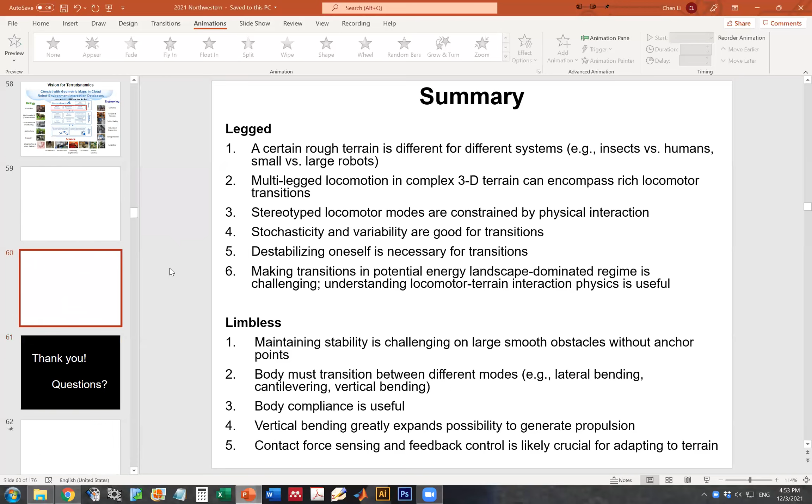Hi, very cool presentation. I have a question about the snakes. So with your robot that you showed climbing the ledge, it had very distinct joints, right? Yes. And it seems like with snakes, it's more of a continuous deformation, unlike the discrete deformation of the robot. Yes. And I'm wondering, how many joints do you really need in order to properly simulate the snake dynamics?

Yeah, that's a great question. So people have done snake modeling, both analytical and numerical. And if it's really to understand snake locomotion, most of the models I've seen typically have pretty large degrees of freedom, almost like a continuous curve. And even for robots, I think they are on the order of 20 segments. I guess that's much less continuous, but it is still a pretty large degree of freedom.

But there also have been studies that really try to look at the fundamental mechanical interaction. For example, there have been studies using 3 links to understand undulatory locomotion interacting with complex media like sand, and the principles there will actually translate quite surprisingly to higher degrees of freedom.

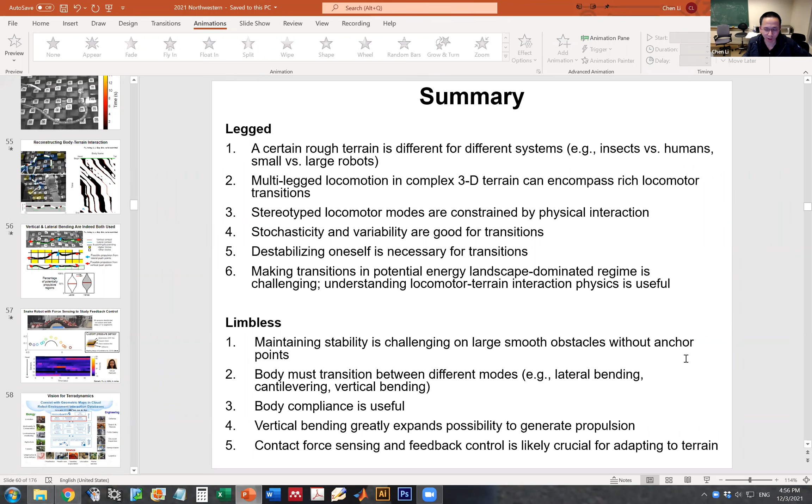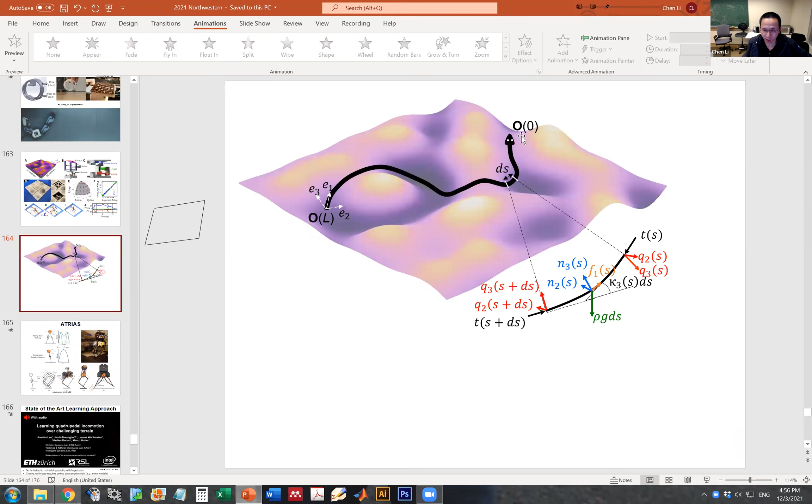And one thing, I don't know if I have slides here. We have done some preliminary modeling. Oh, actually here. Yeah, my students just recently developed a model using kind of a Lie group description of this continuous curve to try to model its interaction with this rough terrain. We have to make the terrain smooth to simplify the contact interaction. We don't have much results yet here, but we're hoping to use this to combine with our experimental systems to begin to address this.

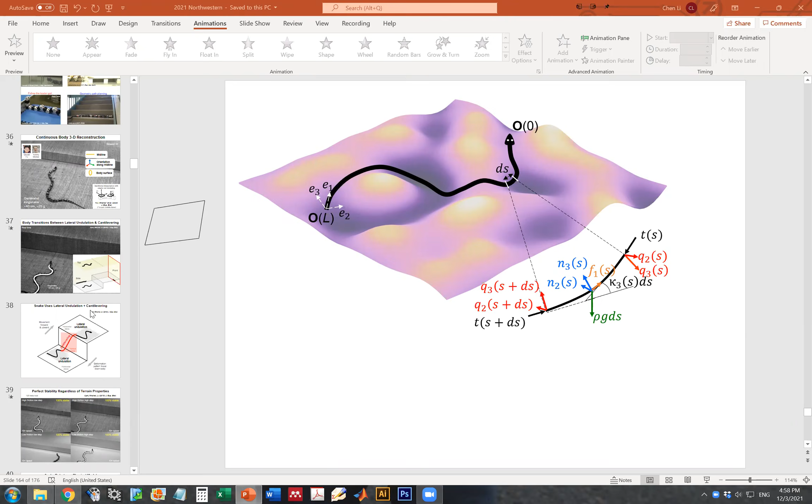Yeah, great question. I haven't thought very much about this off the top of my head. I would say 2 things I can say.

So the other point would be that I think that at least for snakes, I don't think snakes will really have much problem unless they maybe fall off of a cliff and hit the ground. I think that in these kinds of environments, snakes are typically really, really slow.

So relatively speaking, they're really slow, at least in the lab. That's something I wondered about too. I've seen David Attenborough's video in which the snake can actually leap off momentarily, but typically their motion is considered more kinematic - they don't really build up much momentum. So I think at least in the case of snakes, that wouldn't be an issue.

But I certainly agree that for animals as large as humans or horses, or even on the scale of dogs, if you have very high speed running into something, that's going to hurt you. So I would guess the solution would be to not have such collision, but still make use of interaction. If one thing I hope people can take away, it's not specifically about these particular cockroaches or snakes, but that we really need to understand this physical interaction aspect better than we have, to enable a lot of real world applications more robustly and autonomously.